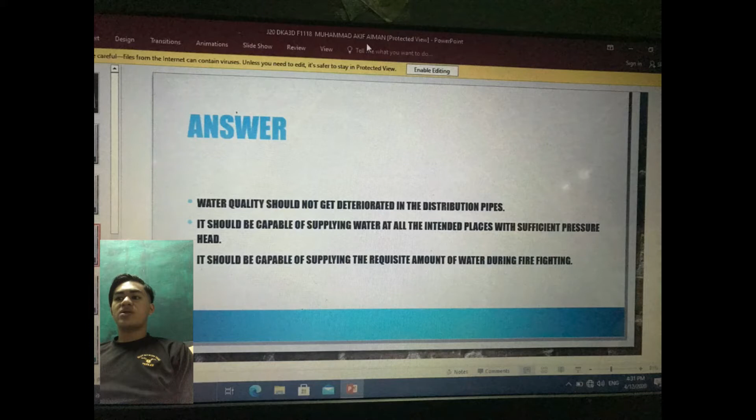It should be capable of supplying the required amount of water during firefighting. Question 3B: The purpose of distribution system is to deliver water to consumers with appropriate quality and pressure.

With the aid of a diagram, briefly describe the type of water distribution system as follows: 1, gravity system; 2, pump system.

For the answer, gravity system is suitable when source of supply is at sufficient height. Most reliable and economical distribution system. The remaining head is consumed in the frictional and other losses.

The answer for pump system: treated water is directly pumped into the distribution main without storing, also called pump without storage system. High lift pumps are required. If power supply fails, complete stoppage of water supply occurs. This method is not generally used.

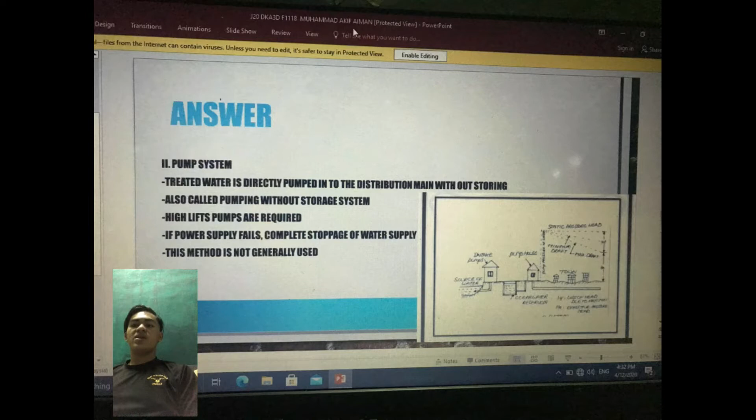Question 3C: Loss of water due to leakage is a common phenomenon observed practically in all water distribution systems. However, the leakage volume can be reduced significantly if the occurrence of leak is detected within minimal time after its occurrence. Interpret the leak control method below.

1, gas tracer; 2, passive control; 3, pressure control; 4, visual inspection. The answer for the first one:

This technique uses a tracer gas such as helium, hydrogen or sulfur hexafluoride. The gas is injected into the pipe, either empty or full. If full, the pressure must reach 3 to 5 psi over the line pressure to ensure the presence of the tracer gas in the line. The advantage of tracer gas is the ability to detect small leaks before they become a major problem.

The answer for the second one: Passive leak control only repairs evident leaks, either due to consumer complaints or due to water appearing on the road surface. In active control, an organized and systematic program is undertaken in order to detect, locate and repair leaks.

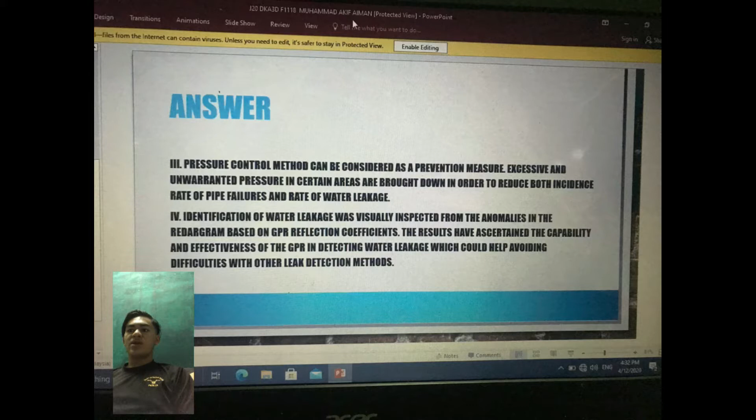The answer for the fourth one: identification of water leaks was visually inspected from the anomalies in the radargram based on GPR reflection coefficients. The results have ascertained the capability and effectiveness of the GPR in detecting water leaks, which could help avoid difficulty with other leak detection methods.

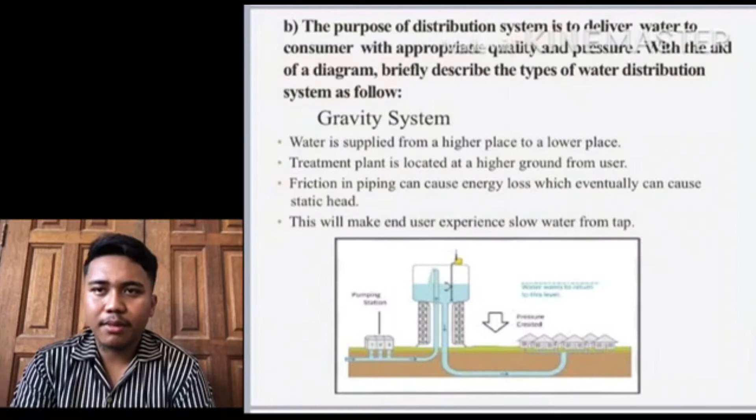For question B, the types of water distribution: first, the gravity system. Water is supplied from a higher place to a lower place. Treatment plant is located at a higher ground from the user. This will make the end user experience slow water from the tap.

The second one is the pump system, used for low pressure end users, located on lower ground than the end user. Pressure and flow of water can be adjusted for demand.

For the C question, interpret the leakage control methods below. The first is gas tracer, a method to detect leakage using a portable gas sensor. It is used to detect non-toxic gas as it escapes through leaks in pipes.

The second one is passive control. Leakage will be fixed based on reports from the concerned community.

The third one is pressure control, used in areas that have high pressure changes. A small reduction in pressure will reduce leakage significantly.

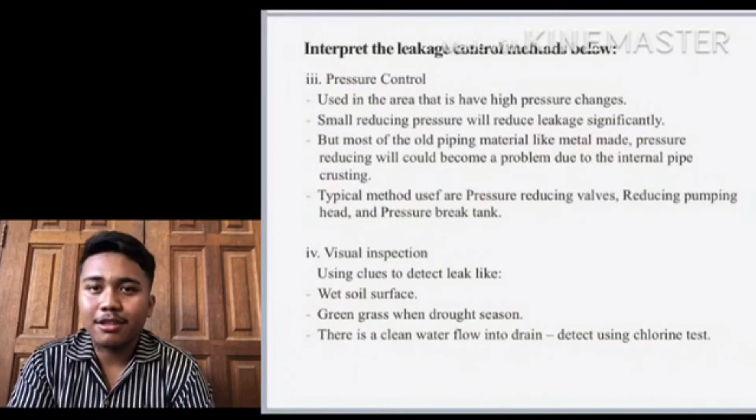First, a reservoir is a storage space for fluids. List 5 types of reservoir construction materials. The answer is: first, reinforced concrete; second, pre-stressed concrete; third, galvanized pressed steel; fourth, glass reinforced plastic; fifth, steel fused

with glass. Again, the purpose of a distribution system is to deliver water to the consumer with appropriate quality, quantity and pressure. Describe water distribution using the gravity system method.

The answer is: when using water distribution via the gravity system, water needs to be supplied from a higher place to a lower place. A treatment plant also needs to be located at higher ground than the user. Friction in piping can cause energy loss, which eventually can cause static head that will make the end user experience slow water from the tap. But this type of water distribution also has disadvantages, which is that static head will cause a drop

in pressure. The pressure will decrease as the water passes through the front residential area pipes, causing the pipe at the end of the residential area to get little water. This can cause anger among the people.

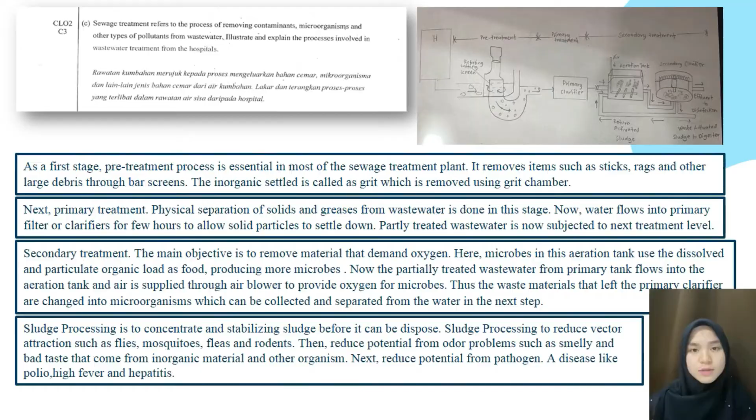For question one, a physical examination of sewage is carried out in order to determine its physical characteristics. Describe briefly the characteristics of odor and color. The characteristics of odor: odors range from musty smells to hazardous gases. Most of the odor-producing compounds in domestic wastewater result from anaerobic biological decomposition of organic materials.

Next is characteristics of color. The color of the water is an indication that it contains contaminants of different materials and in varying concentrations. The other type of effluents in water that impart color to it are organic in nature—this can be peat materials, different types of weeds, and humus.

For question B, explain the functions of the units in a primary treatment system with the aid of a schematic flow diagram. Primary treatment removes material that will either float or readily settle out by gravity. The main objective is to remove solids that cause damage to plant components, and normally only physical processes are involved. It includes the physical processes of screening, comminution, grit removal, and sedimentation.

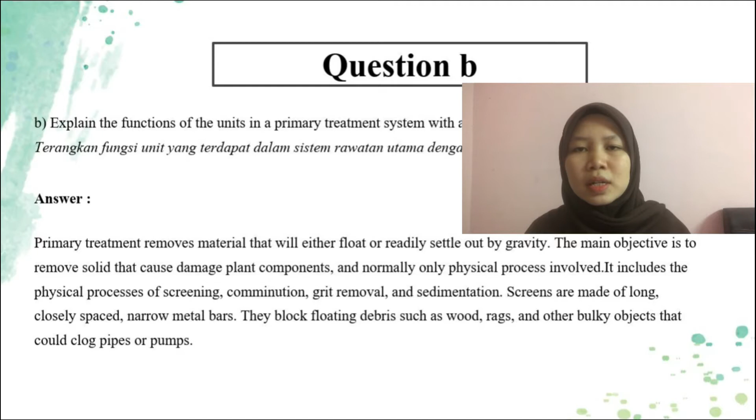Last question: interpret the operation principles of a sewage oxidation pond. Oxidation ponds, also called lagoons or stabilization ponds, are large, shallow basins of controlled shape, designed for small communities or industrial plants. The process involves two major steps in the decomposition of organic sludge in wastewater. The carbonaceous sludge is first oxidized by aerobic microorganisms with the formation of carbon dioxide and the inorganic forms of nitrogen and phosphorus. These inorganic forms are then used by algae in their photosynthesis reaction.

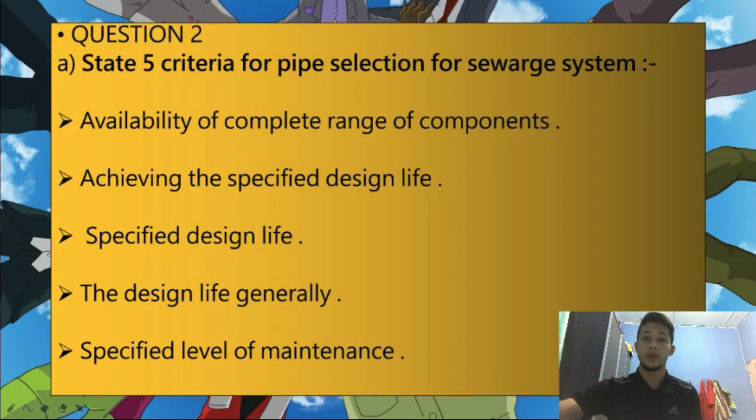Question B is to interpret how corrosion in a pipe occurs. Corrosion in a pipe occurs because bacteria in the slime under flowing sewage convert sulfate in the sewage into sulfide in the liquid, which makes its way to the surface of the sewage and is released into the sewer atmosphere as hydrogen sulfide.

H2S gas in the atmosphere makes contact with slime in the crown of the sewer, which contains more bacteria. Bacterial action converts H2S gas to sulfuric acid, which causes corrosion in the crown of the pipe, and this corrosion is also called crown corrosion. If the pipe material is corrodible in nature, sulfuric acid attacks the pipe material and causes ultimate failure. Okay, next, question C.

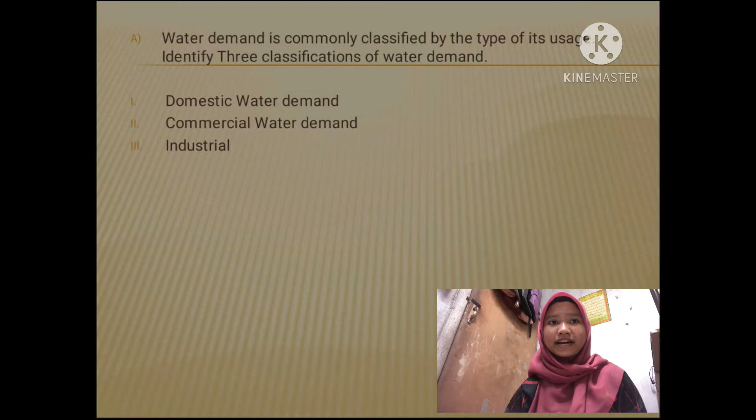Three classifications of water demand are domestic water demand, commercial water demand and industrial. Okay, for question B, first we must find the percentage increase in population. To get the percentage, we must take the population in year 1952 minus the population in year 1942. So we can get 79,300. Then we must divide by 814,200. The answer will be times 100 and we can get 9.74%.

Last question, we must find the water demand for year 2020 by using the formula Pn times Q times F1 times F2 plus NRW plus Dn. So the final answer we will get is 36,549,333.33.

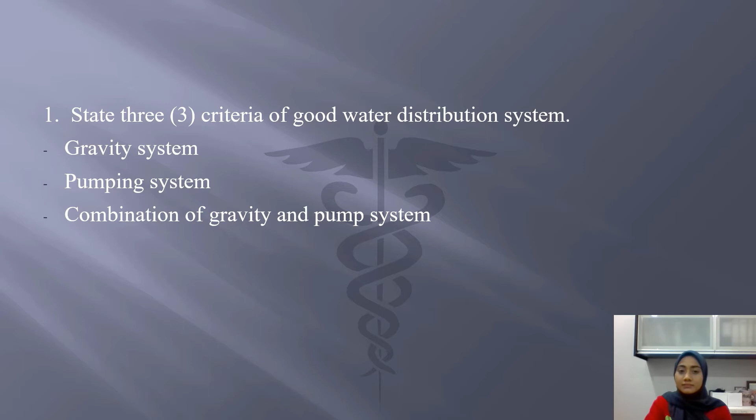First question. State 3 criteria of a good water distribution system. First, gravity system, pumping system, and combination of gravity and pump system. Next, question 2. The purpose of a distribution system is to deliver water to consumers with appropriate quality and pressure. With the aid of a diagram, briefly describe the types of water distribution system as follows. First, gravity system, and second, pump system.

This is for the gravity system. Water is supplied from a higher place to a lower place. Next, the treatment plant is located at higher ground from the user. Next, friction in piping can cause energy loss, which eventually can cause static head. This will make the end user experience low water from the tap. There are 3 advantages. First, reliable. Next, low operation cost, and suitable for communities at lower ground.

Next, disadvantages. First, static head will cause a drop in pressure and cause end users to be angry. Next, the pump operates at different speeds according to the rate of flow, causing the pump to be damaged quickly.

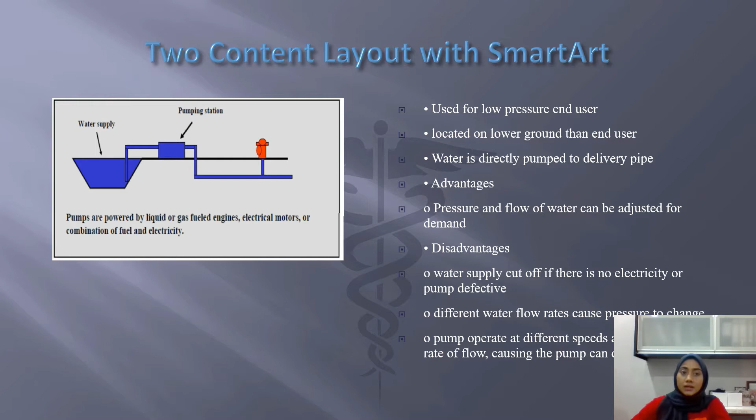Loss of water to leakage is a common phenomenon observed practically in all water distribution systems. However, the leakage volume can be reduced significantly if the occurrence of leakage is detected within minimal time after its occurrence. Interpret the leakage control methods below: gas tracer, passive control, pressure control, and visual control.

First, tracer gas. A portable gas sensor is used to detect non-toxic gas as it escapes through a leak in the pipe and rises through the surrounding soil to the ground surface. Next, passive control. Leakage will be fixed based on reports from the concerned community. Fixing is based on complaints or reports, sometimes considering new piping in an old area.

Third, pressure control. Used in areas that have high pressure change. Small pressure reduction will reduce leakage significantly, but with most old piping material like metal, pressure reducing could become a problem due to internal pipe crusting. Fourth, using clues to detect leaks, like wet soil surface or green grass in the drought season. If there is clean water flowing into a drain, detect it using a chlorine test.

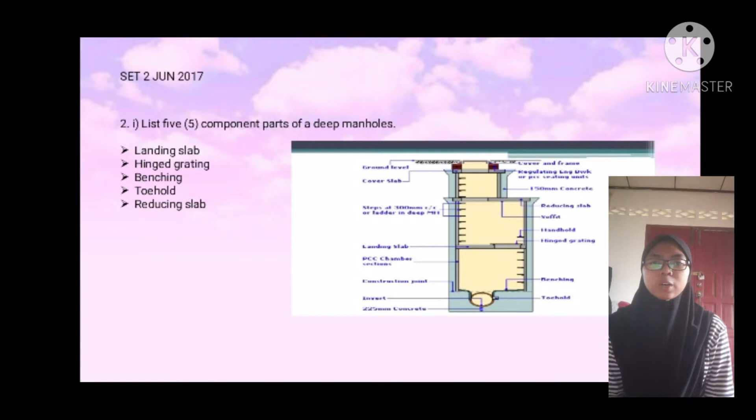The next question is the calculation question. A residential scheme has 3 lines of terrace houses comprising 45 housing units. By using the Manning formula to determine the flow velocity, determine the diameter of the sewer pipe required. Assume full pipe velocity. Data given: water demand per capita 250 liters per person per day, household 5 persons per unit, flow rate factor is 6, roughness coefficient is 0.013, and sewer pipe slope is 1 in 200.

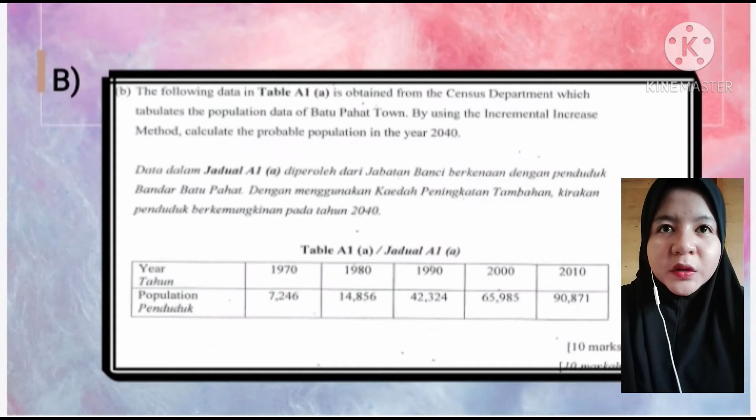Last but not least, I'll present the question of C, which is: Matang district population in 2050 is estimated to be 356,000 people. Calculate the water demand during the year in which the water coverage is 90%, take design factor as 1.0 and non-revenue water as 21%, use per capita consumption as 225 liters per capita per day, assume there is no industrial water requirement.

Next, I'll present the answer of C using the formula P × Q × F1 × F2 + NRW. We can see the answer of WD 2050, which is 87,228,900 liters per day.

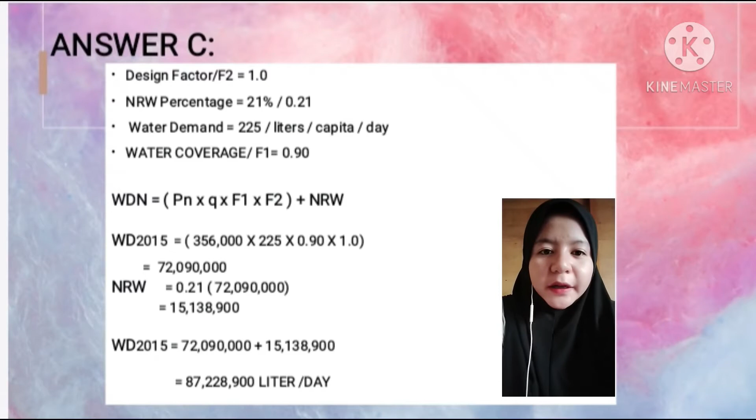Today I will talk about the final question, June 2019 session, section A, question 2. Identify 5 purposes of wastewater treatment. Answer: first, fisheries. Second, wildlife habitats. Third, recreation and quality of life. Fourth, health concerns. Fifth, to survive for the future generation.

Okay, question B. Biological sewage treatment is an important part of any wastewater treatment plant that treats wastewater from either municipality or industry. Identify 5 differences of the following processes of biological sewage treatment between oxidation pond and activated sludge.

Oxidation ponds, also called lagoons or stabilization ponds, are large shallow ponds designed to treat wastewater through the interaction of sunlight, bacteria and algae. Second, mechanical aerators are sometimes installed to supply yet more oxygen, thereby reducing the required size of the pond. Third, sludge deposited in the pond must eventually be removed by dredging.

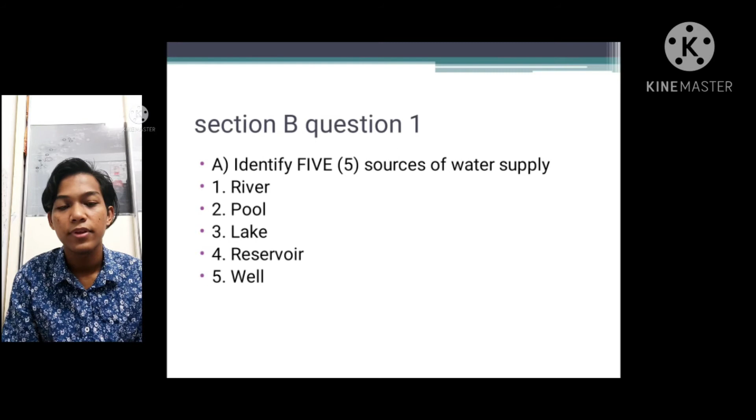Okay, B. Describe in detail 5 physical characteristics of water. Okay, the first one is odors. Odors range from musty smells to hazardous gases. Most of the odor-producing compounds in domestic wastewater result from the anaerobic biological decomposition of organic materials.

Second, colors. The color of the water is an indication that it contains contaminants of different material and in varying concentrations. Some of these materials are chemical in nature. These are mostly industrial effluents discharged from factories. Third one is temperature. High temperature allows the existence of bacterial activity and can affect water use. Temperature will give impact on chemical reaction, aquatic life, and water for domestic use.

Okay, number 4. Turbidity. Turbidity is a measure of the cloudiness of water. The cloudier the water, the greater the turbidity. Okay, fifth is turbidity content. It is closely related to total suspended solids, TSS, but also includes plankton and other organisms.

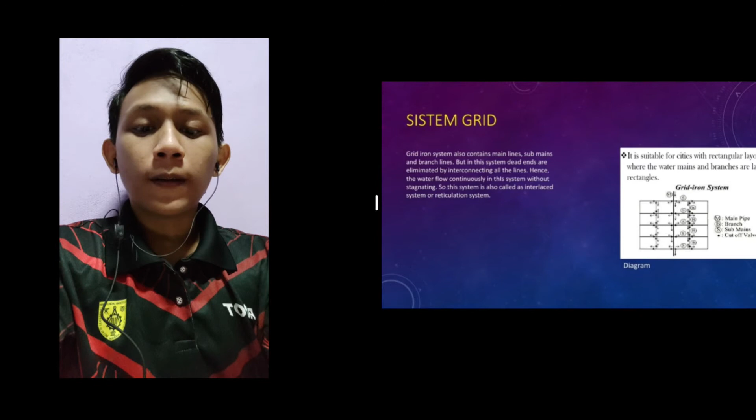Next, the question: list 4 types of valve. Firstly ball valve, second butterfly valve, third choke valve, and then gate valve.

Okay, the last example final exam question: advantages and disadvantages of pump system and gravity system. Pump system advantages: ability to supply water to higher ground areas. Second, lower running cost. Disadvantages: water supply is interrupted when there is interruption in the electricity supply. Second, high pressure during low demand period at night can cause damage.

And then gravity system advantages: no energy cost, and simple operation. Disadvantages: gravity system is less flexible for future extension. Second, longer pipelines are necessary.

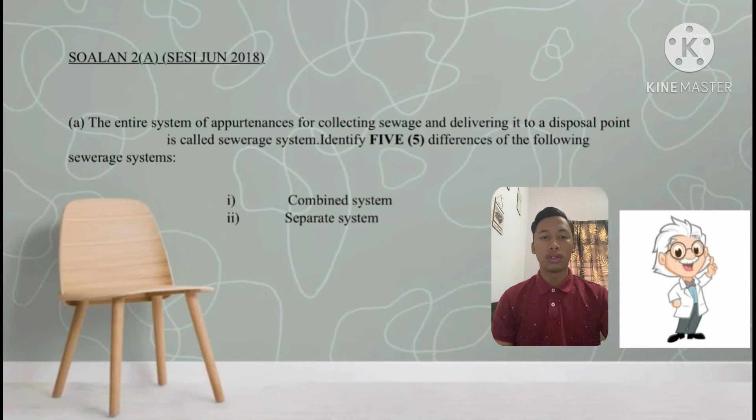The question reads: the entire system of appurtenances for collecting sewage and delivering it into a disposal point is called a sewerage system. Identify 5 differences of the following sewerage systems: first, combined system, and second, separate system. Separate system: first, the quantity of sewage to be treated is less because no treatment of storm water is done. Combined system: as treatment of both is done, the treatment is costly.

Number 2, in cities of more rainfall, the separate system is more suitable. Combined system, in cities of less rainfall, the system is suitable. Third, separate system, as two sets of sewer lines are laid, this system is cheaper because sewage is carried in underground sewers. Whereas combined system, overall construction cost is higher than separate system. Number 4, in narrow streets, it is difficult to use the separate system. Combined system is more suitable in narrow streets.

And lastly, separate system, less degree of sedimentation is achieved in this system as storm water is disposed without any treatment. Whereas combined system, high degree of sedimentation is achieved in this system.

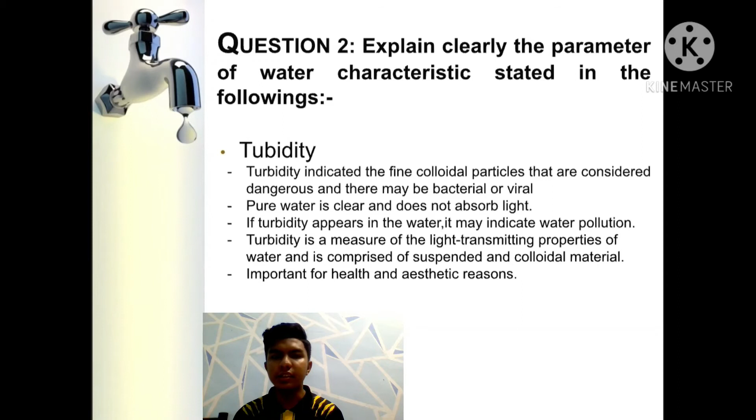The second is pH. pH is really a measure of the relative amount of free hydrogen and hydroxyl ions in the water, affecting chemical processes like chlorination. Third, affecting biological life like the effectiveness of bacteria. Fourth, pH of water is measured between 0 to 14 to determine how acid or alkaline, a measurement conducted using a logarithm scale. pH value of water is important as an indicator to evaluate water quality, as well as a comprehensive reflection of hydrochemical characteristics.

So the next question is question 3. By referring to the statement above, identify 3 contaminants that were removed from the drinking water. The first one is point sources. The source of pollution is emitted directly into waterways and can be detected. It is discrete and relatively easy for treatment. For example, the discharge of sewage, effluent, and toxic waste into the water from residential, industrial, and land animals. The second one is non-point sources. The source of pollution is scattered or diffuse, thus making it unable to be determined. For example, pollution resulting from the opening of new cities, agriculture, logging, construction, and road building. The common source of pollution is surface runoff, the transfer process of pollution caused by rain. Pollutants are carried from the natural state, decaying plants, from farming activity, especially fertilizer which contains phosphate, and livestock feeds.

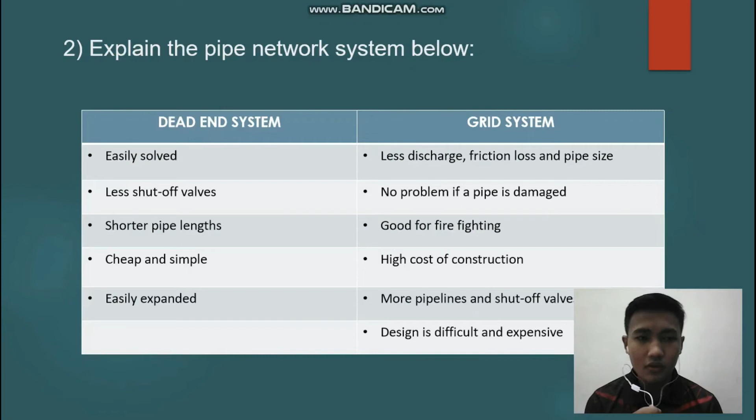Last question is, interpret the following underground pipe leakage determination method. First method is visual inspection. Visual inspection is wet soil surface, green grass when drought season, and there is a clean water flow into drain.

Detect using chlorine test. The second one is leak noise correlator. Leak noise correlator is more efficient or accurate in iron pipe, not plastic, measuring at two suspected points by vibration or sound. And lastly, vibrations are transmitted from sensor to the correlator.

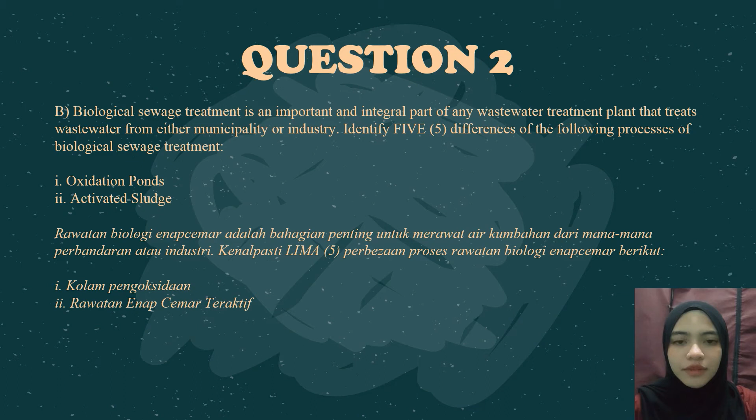For oxidation ponds: first, a shallow basin of contour shape which is designed for small communities or industrial plants. Second, the process involves 2 major steps in the decomposition of organic load in wastewater. Third, the carbonaceous load is first oxidized by the aerobic microorganism with the formation of carbon dioxide and the inorganic forms of nitrogen and phosphorus.

Fourth, these inorganic forms are then used by algae in their photosynthetic reactions. And the last one is, as a result of the reaction in the ponds, the organics in wastewater are partly oxidized and partly converted to algae cells.

For activated sludge, first, microbes require air to live and eat, thus air is pumped into the tank. Second, microbes in this aeration tank use the dissolved and particulate organic load as food, producing more microbes.

Third, the process takes advantage of aerobic microorganisms that can digest organic matter in sewage and clump together by flocculation as they do so. Fourth, a settling tank allows the biological floc, the sludge blanket, to settle, thus separating the biological sludge from the clear treated water.

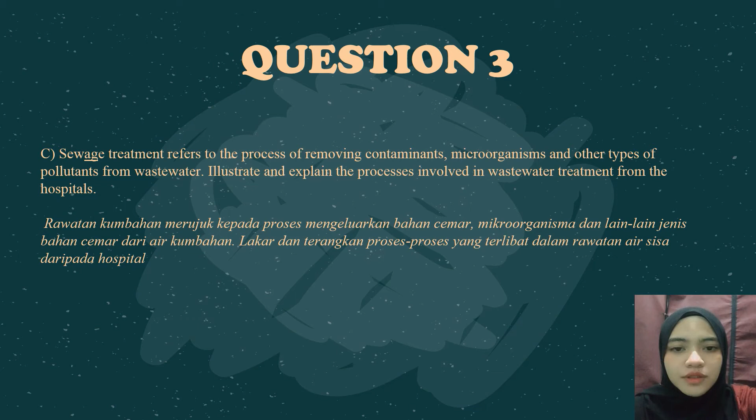Question 1: State 5 importance of chlorine residual test for water supply. Firstly, to inactivate the bacteria and some viruses that cause diarrheal disease. Secondly, to protect the water from recontamination during storage.

To determine how much sodium hypochlorite solution to add to the water that will be used for drinking. To maintain free chlorine residual in the water. To kill microorganisms which cause typhoid, cholera, hepatitis, and other diarrheal disease.

Lastly, it is important because if there is not enough chlorine in the water, the microorganisms will not be killed. And if there is too much chlorine in the water, the user may not want to drink it because of the taste of the chlorine, and may be tempted to use other less safe water supplies.

Question 2: Describe 5 significance of the water treatment process. For water purification, it purifies water to become drinking water, allowing humans to benefit from both drinking and irrigation use. It removes contaminants and undesirable components, or reduces their concentration, so that the water becomes fit for its desired use.

It saves the lives of many human beings and living things who die from fatal diseases such as cholera and typhoid, caused by consuming contaminated water. Lastly, it kills the germs or bacteria in the wastewater and removes solid impurities and odor.

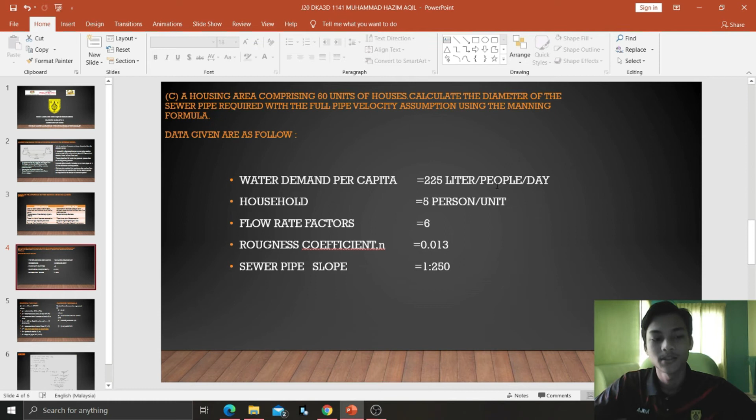Water demand per capita is 225 liters per person per day. Household is 5 per unit. For flow rate, factor is 6. Roughness coefficient is 0.013. Lastly, sewer pipe slope is 1/250. Okay.

Now I will explain the formula we will use in this question. Okay, we will use this formula. The formula is Manning formula 1. Manning formula has two, which is formula 1 and formula 2. For formula 1, Q equals AV equals A Kn/n R^(2/3) S^(1/2),

where Q is volume flow, A for cross-sectional area of flow, V for cross-sectional average velocity, Kn is 1.486 for English units, and Kn equals 1.0 for SI units. For capital A, cross-sectional area of flow, n, Manning coefficient of roughness, R, hydraulic radius, and lastly, S is slope

of pipe. Okay, for formula 2, hydraulic radius can be expressed as R equals A/P, where A is cross-sectional area of flow, P for wetted perimeter, Q equals 1/n ... power of 2 and 1/2. Okay. I will explain the answer.

Okay, for question A, state 5 types of chemical characteristics of wastewater. First is pH. Second, dissolved oxygen. Third, hardness. Fourth, organic compound. And fifth, nutrient.

Okay, next is question B. Initial stage in wastewater treatment process is preliminary treatment. Describe briefly the screening process and grit removal process in preliminary treatment for wastewater. Okay, first, the screening process has two types, coarse screening and fine screening.

Coarse screening is to remove floating materials like wood, plastic, bottles, tree branches and trash. And then fine screening is to remove small floating materials like leaves and aquatic plants. Second, grit removal process uses a retention chamber to make water flow slowly and settle the sand and grit.

This process is to remove algae or aquatic organisms and small debris that can block the treatment plant filter. This process also has an aeration process to add oxygen and eliminate bad odor and unpleasant taste by using four methods. That is spray aerator, gravity aerator, diffuser and mechanical aerator.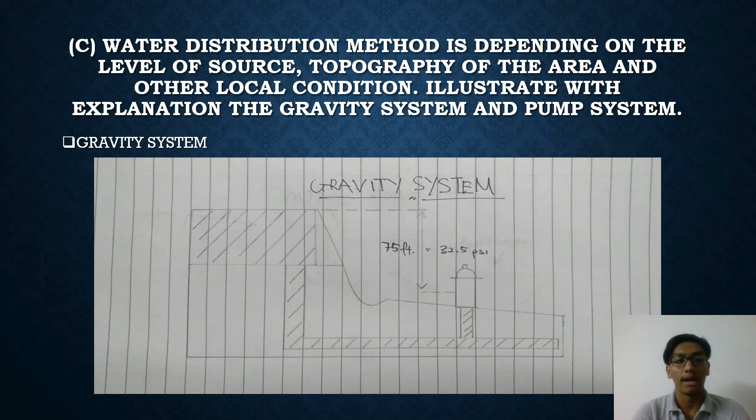and improper depth. Third question: water distribution method depends on the level of the source, topography of the area and other local conditions. Illustrate with explanation the gravity system and pump system. As you can see below, this is an example of the gravity system that I drew. This is the explanation for the gravity system. First, water is supplied from a higher place to a lower place. Next, the treatment plant is located on higher ground than the user. Third, friction in piping can cause energy loss, which eventually causes static head. Last, this will make the end user experience slow water from the tap.

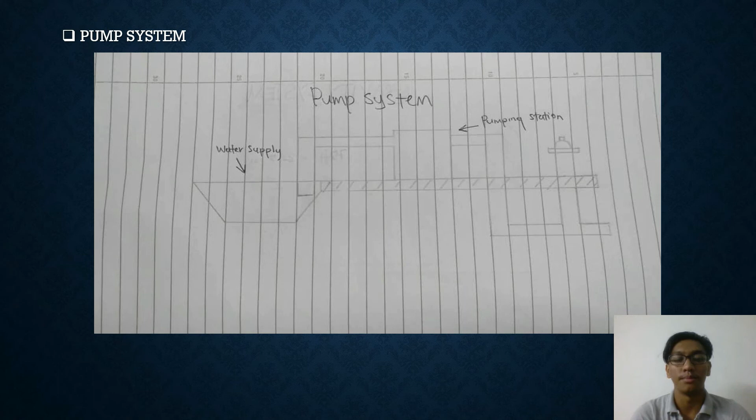Next is the pump system. As you can see below, this is a pump system example that I drew. This is the explanation for the pump system. First, used for low pressure end user. Next, located on lower ground than the end user. Last, water is directly pumped to the delivery pipe.

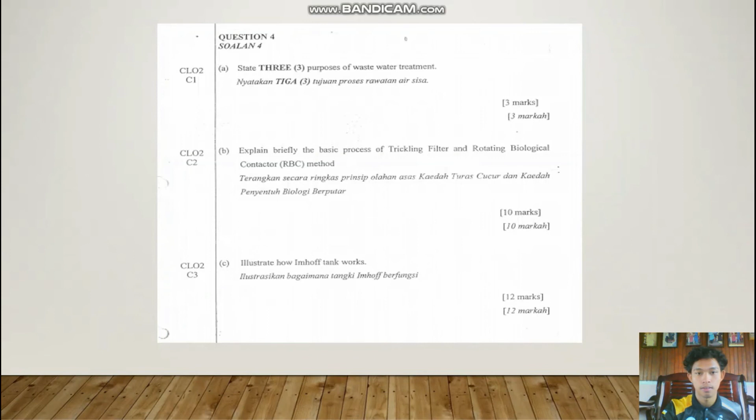Today, the presentation is about the final exam question December 2017, Water Supply Engineering. This is our question paper. We have 3 questions, A, B, and C. First, we go to A. The question is, state 3 purposes of wastewater treatment. Number 1, to kill organisms that can cause disease and eliminate pollution and death. 2, eliminate unpleasant odors, tastes, and colors. 3, dissolve minerals, reduce corrosion.

Now we go to B. Explain briefly the basic process of the trickling filter and rotating biological contactor (RBC) method. We go to the trickling filter first. Trickling filters provide aerobic treatment of wastewater. Wastewater is generally pumped from a recirculation tank or compartment, dispersed over a media bed and allowed to drain back into the recirculation tank. The wastewater is aerated as it flows through the media bed, which may consist of a variety of media such as tire chips, stone, and rigid plastic, configured into a number of shapes. Examples are honeycomb blocks, rings, or cylinders.

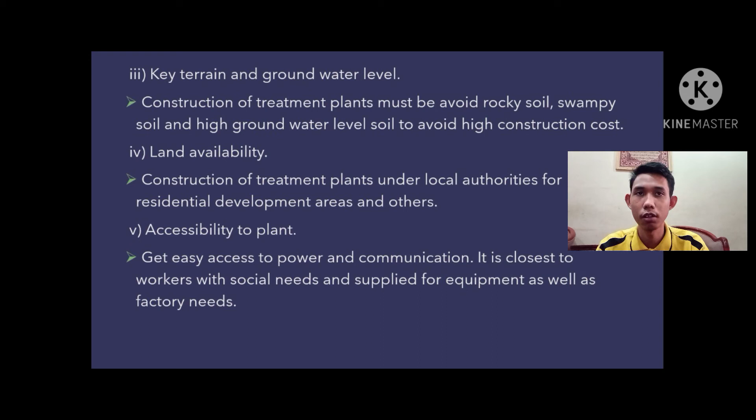And the explanation, coagulation is the process of destabilization of the negative charge on suspended particles and colloids at optimum dose. The purpose of destabilization is to reduce the repelling character of the particles and allow them to become attached to other particles, so that they can be removed in the following process. The particulates in raw water are mainly clay, silt, virus, bacteria, fulvic and humic acid, mineral and organic particles. Most coagulants are cationic in water such as alum, ferric sulfate, lime and cationic organic polymer.

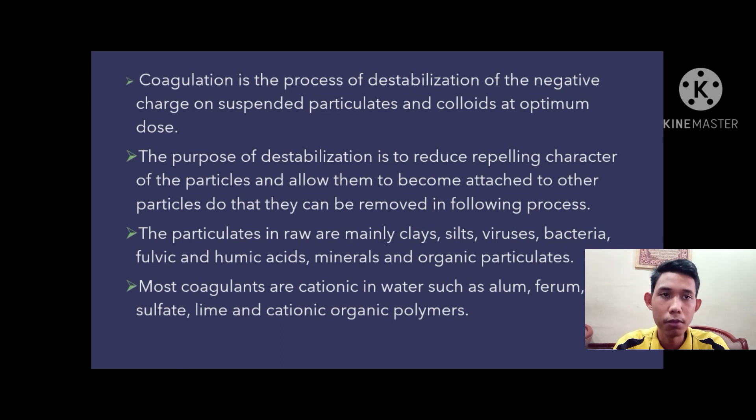Next, should media filtration be chosen, pressure or gravitational filters can be used. This works by the media forming a barrier to the passage of suspended solids, adsorbing some compounds contained in the liquid. Finally, membrane technologies can be used. This includes ultrafiltration, microfiltration, nanofiltration, and reverse osmosis. They will retain different sizes of particles and ions, allowing pure water to flow through. It is also possible to use water filter catchers, acting as protection, retaining solids and particulates upstream.

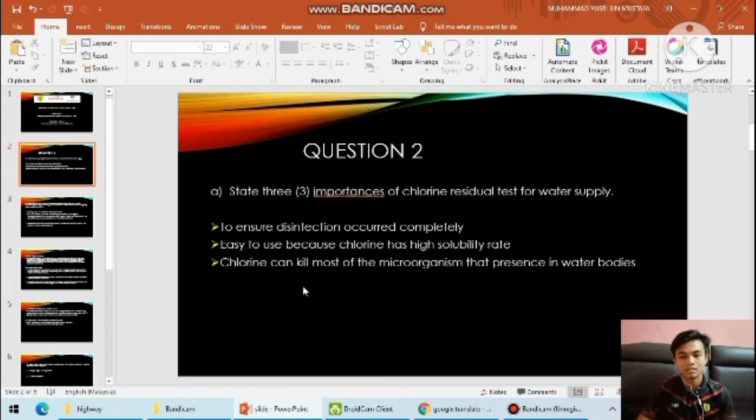Question B is, site selection is important to be considered when designing water treatment plant. Explain 5 site criteria to be considered when designing water treatment plant. The answer number 1 is planning and environment constraint factor. To avoid creating new environmental problems by ensuring the consequences for the environment are properly taken into account in site selection, planning, and design of all new development. Then, to seize opportunities for environmental improvement as they arise in the course of urban redevelopment.

Then, the second answer is plant design site factor. This course provides the fundamentals for the selection and design of the most appropriate, cost-effective, and sustainable wastewater or sanitation treatment system. It also provides the basics on technology selection and costing and engineering economics for the analysis, evaluation, and comparison of different treatment alternatives.

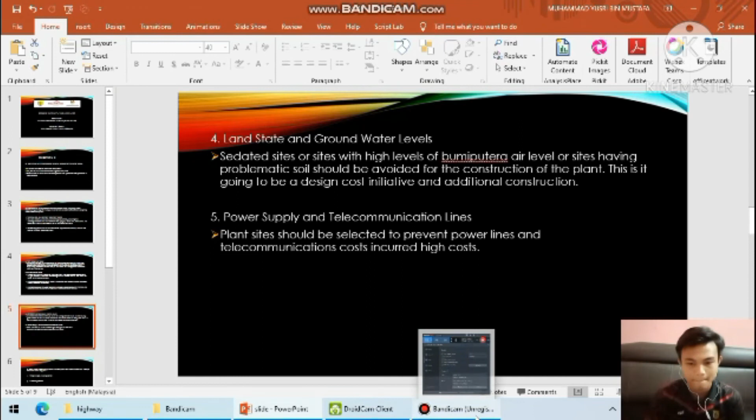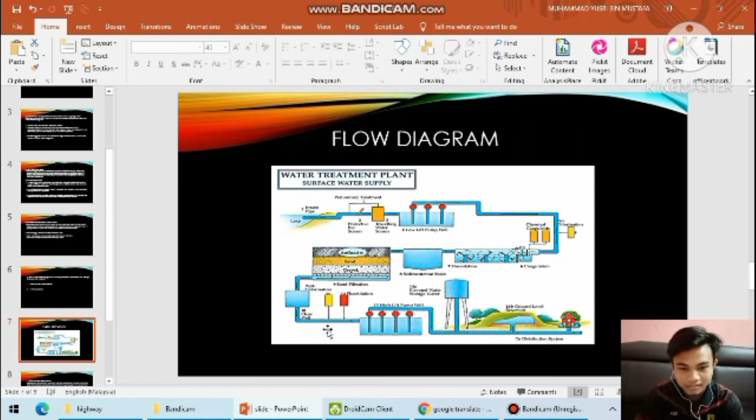Question C is draw water treatment process flow diagram from water intake until storage tank and briefly explain the principle of coagulation and filtration process. We can see the water from the lake enters the intake pipe and several processes occur from preliminary treatment, and last the water is collected in the storage tank or storage tower.

So the principle of coagulation. Coagulation removes dirt and other particles suspended in water. Alum and other chemicals are added to water to form tiny sticky particles called floc, which attract the dirt particles. The combined weight of the dirt and the alum becomes heavy enough to sink to the bottom during sedimentation. And then filtration process. Filtration is the most reliable water treatment process to remove particulate material suspended or colloidal impurities from water. Coagulation, flocculation, and sedimentation are used to assist the filtration process to function more effectively. Then, the water leaving the sedimentation tank still contains floc particles.

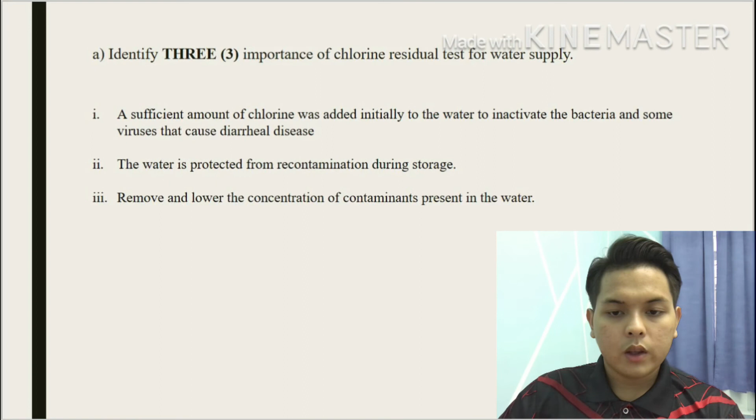Okay, now let's go to question 1: identify 3 importance of chlorine residual test for water supply. First, a sufficient amount of chlorine was added initially to the water to inactivate the bacteria and some viruses that cause diseases. Second, the water is protected from recontamination during storage. And the third is to remove and lower the concentration of contamination present in water. B. Describe 5 significance of water treatment process.

First, coarse screening to remove floating material like wood, plastic bottles, tree branches and trash. Second, aeration to add oxygen, eliminate bad odor and unpleasant taste, and to display easy rusting and oxidizing characteristics such as ferrum and mangan. Number 3 is chlorination to remove ferrum, mangan and H2S and to reduce bad taste, odor and algae. Number 4 is sedimentation. Sedimentation is the process of separating liquid and solid used in water treatment. And the last is coagulation, to reduce the repelling character of the particles and allow them to become attached to other particles.

Question 3 is list 4 chemical processes in water treatment system. First, ferrum and mangan removal. Second, water softening. Third, disinfection. And the last is pH adjustment. Number 4 question is interpret coagulation and flocculation process in water treatment. Coagulation is the process of destabilization of negative charge on suspended particles and colloids at optimum dose. Second, the particles in raw water are mainly clay, silt, virus, bacteria, fulvic and humic acid, mineral, and organic particles.

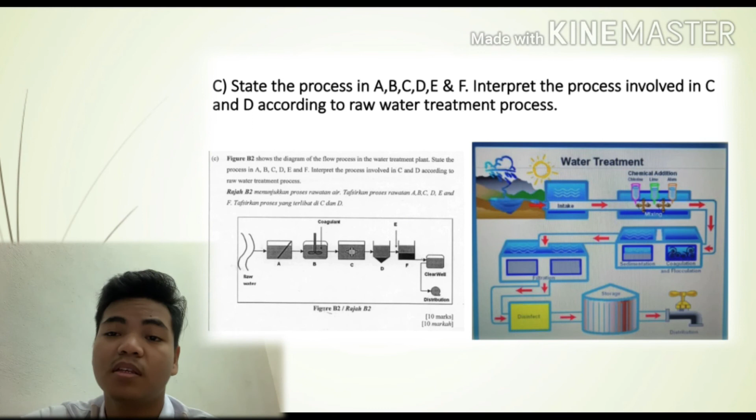So we go to the next question: state the process in A, B, C, D, E, and F. Interpret the process involved in C and D according to the raw water treatment process. So from the diagram below, I can draw the water treatment process picture like this. The first one is from intake to mixing as chemical addition. Next we go to coagulation, sedimentation, filtration, disinfection, storage, and the last one is distribution.

So the last one is the process in C and D. The first process in C and D is flocculation. Flocculation is the agglomeration of destabilized particles and colloids to make settleable or filterable particles. These are subsequently removed by settling and filtration. And the next one is dissolved air flotation, a process that clarifies water by the removal of suspended matter. So thank you. That's all from me.

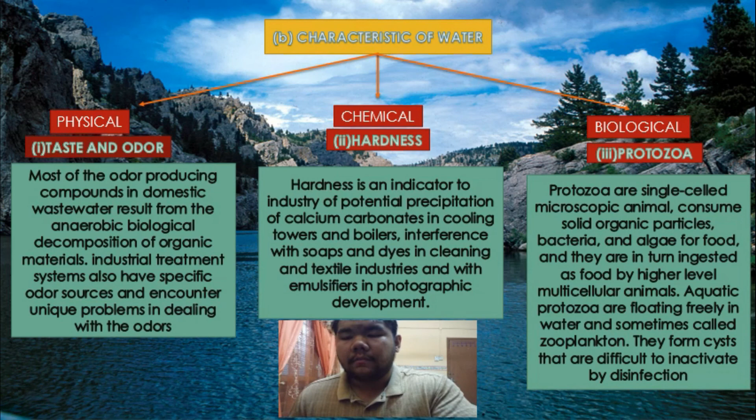Question C, three factors of human activities that could result in reduction of fresh water. First, deforestation in water catchment areas. Extensive forest exploitation in logging and agricultural activities is the cause of soil erosion. Silt deposition and erosion affect the supply and quality of water resources. Two, garbage dumping into rivers. Most rivers in Malaysia are polluted with garbage and industrial waste. Based on the Department of Environment monitoring in 2016, a total of 229 out of 4,473 rivers nationwide were found to be polluted.

Three, runoff of fertilizer and chemical pesticides from agricultural areas also causes water pollution. Rainwater will carry chemical fertilizers and pesticides used by farmers into the river. These toxic substances will kill aquatic life and also cause a decrease in oxygen, and in turn affect the ecosystem.

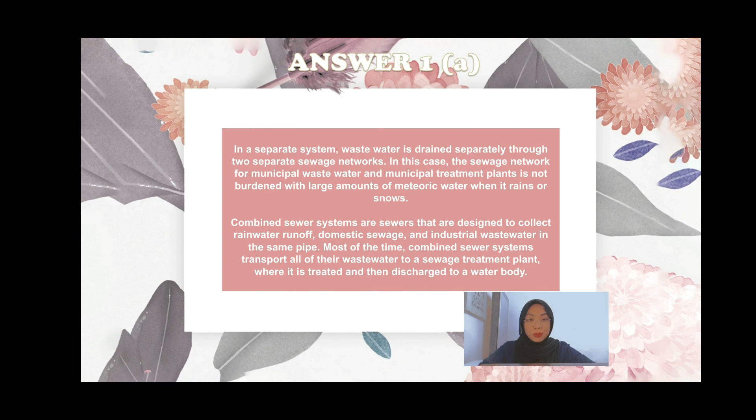The answer is, in a separate system, wastewater is drained separately through two separate sewage networks. In this case, the sewage network for municipal wastewater and municipal treatment plants is not burdened with large amounts of meteoric water when it rains or snows. Combined sewerage systems are designed to collect rainwater runoff, domestic sewage, and industrial wastewater in the same pipe. Most of the time, combined sewage systems transport all their wastewater to a sewage treatment plant, where it is treated and then discharged.

For the next question: Bandar Bukit Raja consists of 240 housing units. The following are some of the criteria of the sewerage system in that residential area.

Water demand per capita is 275 litre per capita per day. Household is 5 persons per unit. Flow rate factor is 6 for population. Self-cleaning velocity is 0.45 meter per second. Manning coefficient is 0.014. Circular with gradient is 1 in 150, and assumption is full pipe flow. Calculate the sewage pipe diameter and determine whether the velocity is adequate.

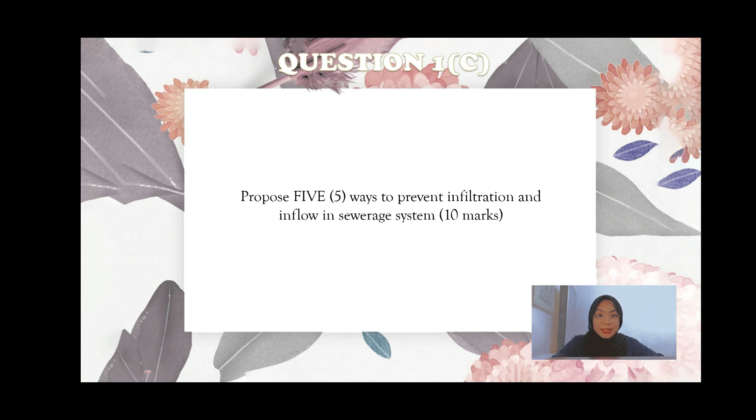The first one is flow monitoring. The first step in identifying infiltration and inflow is to identify where problems are occurring and isolate the areas with the worst issues. Set up flow monitoring instruments in each of your city's sewers. By monitoring the flows, you can better identify which areas may have problems.

Second, manhole inspection and 3D technology. Inspection of manholes can identify leaks from joints and provides the opportunity to review the drainage near a structure. Manholes can be located within a wetland or ditch that gets submerged during rain events. These manholes can contribute significant inflow and infiltration through leaky covers. Three-dimensional manhole scanning technology can inspect manholes and uncover these defects.

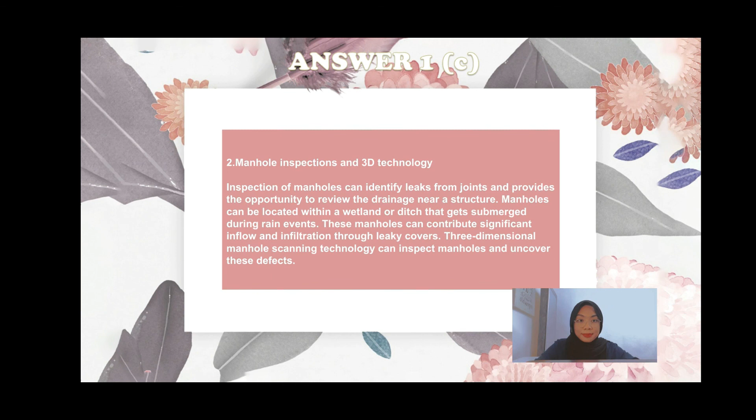Third, smoke testing. After smoke testing reveals infiltration and inflow, there are a number of things you can do to reduce or eliminate it. However, depending on where the leaks are found, the fix can fall on homeowners, such as disconnecting the roof drains and fixing the clean-out caps. If testing reveals leaks in the city connections, you may have to eliminate the storm and sanitary cross connections. This can be costly but yields great savings over time.

Next is dye testing. Dye testing can be used to identify leaks and confirm smoke testing results, using water mixed with a non-toxic dye. The colored water is pumped through the ground and stormwater system and appears in the sanitary sewer collection system where leaks occur.

The last one is closed-circuit television inspection, CCTV pipe inspection. Cities can peek inside their pipes through the use of CCTV. A small camera travels down the length of a pipe and produces visuals, where an operator can identify leaks by way of a monitor view at the surface. CCTV inspection can reveal the need for rehabilitating leaky pipes. Pipe rehabilitation options can include cured-in-place piping (CIPP), trenchless rehabilitation, chemical grouting to seal up leaks, and open cut replacement of pipes.

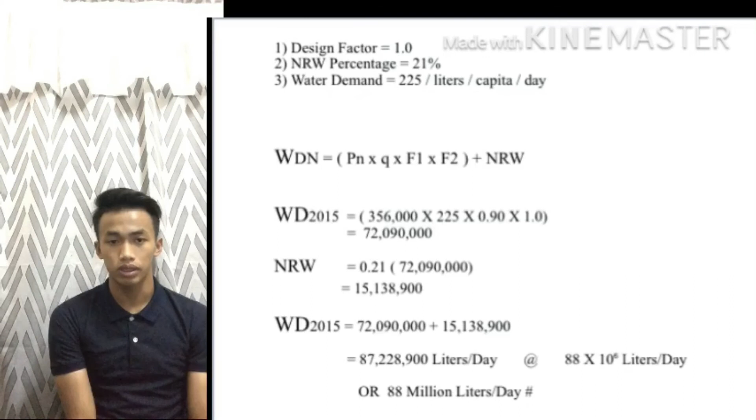For the answer to question C, using the formula WDN, calculate the sum of all that is included in the bracket, and we get an answer of 72,090,000. Then the sum must be multiplied by the NRW value of 0.21, giving a total of 15,138,900. Last, both amounts must be added to get the actual value of 88 million liters per day.

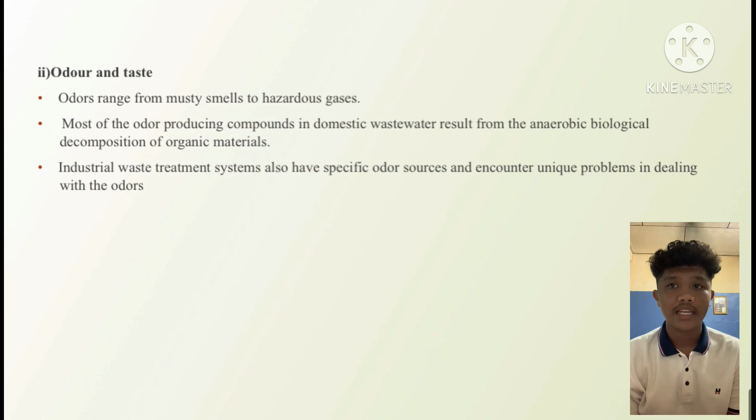Turbidity is a measure of the cloudiness of water. The cloudier the water, the greater the turbidity. It's caused by suspended matter such as clay, silt, and organic matter, and by plankton and other microscopic organisms that interfere with the passage of light through the water.

Lastly, turbidity itself is not a major health concern, but high turbidity can interfere with disinfection and provide a medium for microbial growth. It also may indicate the presence of microbes.

For the last question, the source of the Earth's water can be described by the water cycle, in which the inlet water is directly proportional to the outlet. First is to interpret surface water resource. Surface water is any body of water above ground, including streams, rivers, lakes, wetlands, and creeks. The ocean, despite being salt water, is also considered surface water.

Surface water participates in the hydrologic cycle, or water cycle, which involves the movement of water to and from the Earth's surface. Precipitation and water runoff feeds bodies of surface water.

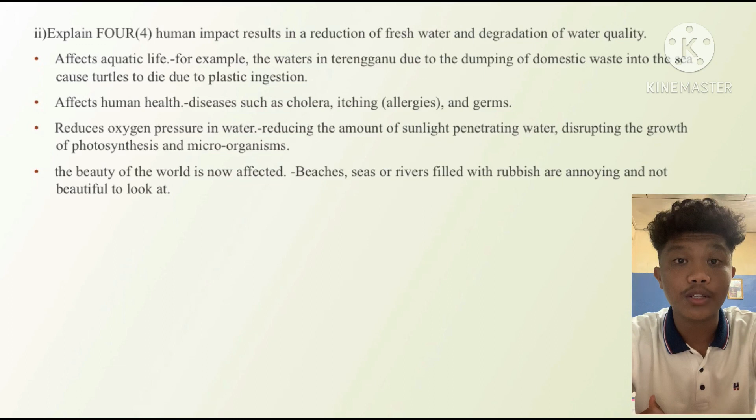Lastly, the beauty of the world is now affected. Beaches, seas or rivers filled with rubbish are annoying and not beautiful to look at. That's all from me. Thank you.